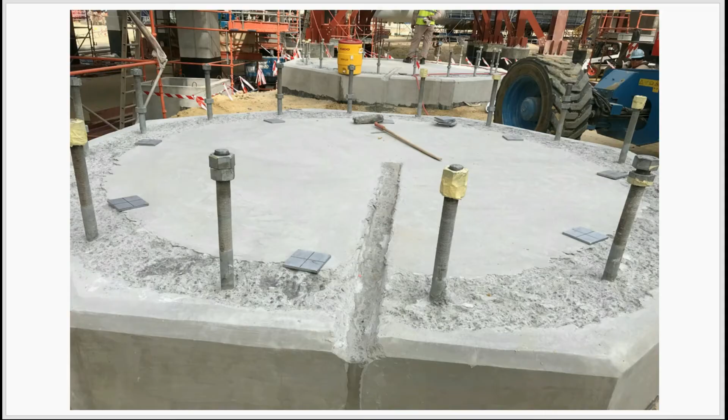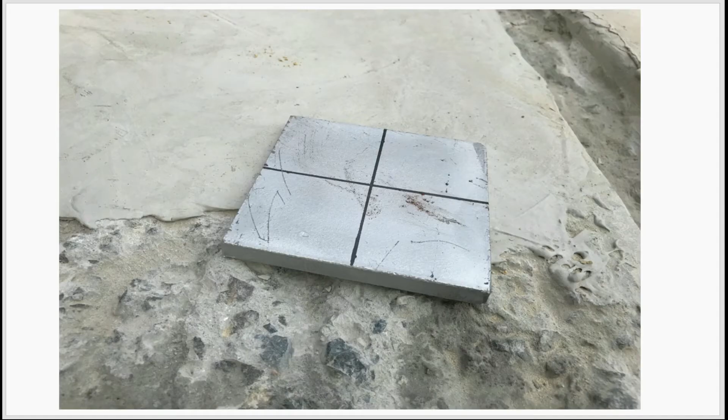Okay, so let's go to another photo. Here you can see this is a pad plate. Maybe it is 150 mm, and the thickness is almost 15 to 20 mm. So this is called a pad plate. And why is this marking done? Because this is the center line of the pad plate,

and when you mark the center line of the foundation as per the drawing, when you mark the foundation outline, you have to match this one, right? And always remember, this pad plate should be inside the vessel. I will discuss that in the next slides.

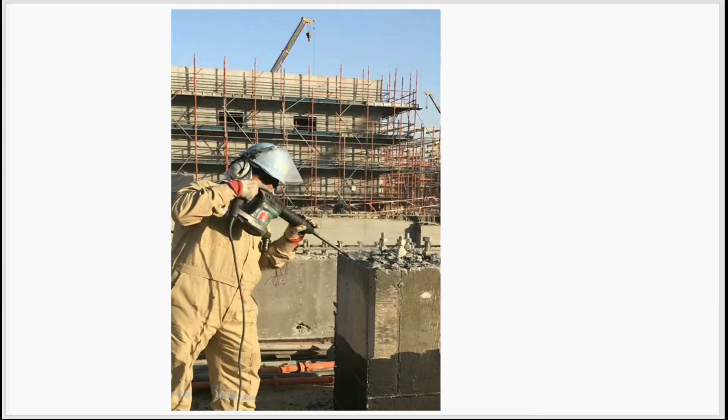Okay, so I want to show you here what tool they use and how we do that. See, this is just an example of a foundation, though it is a structural foundation, and this is the machine. This is called a chipping machine. It runs on electricity, and here is a button.

So when you push the button, you have to hold it very tightly because it gives a lot of pressure, like a gun, same as a drilling machine. You have to hold it very tightly so that you can chip it, otherwise it will bounce back and can cause damage to you. Okay, so this is how we are going to chip.

We will just push a little, and then chip some 25 mm to 50 mm, as per the foreman and supervisor, or you can refer to the drawing for how much chipping you want. And the foundation also has some elevation. So you have to check first the elevation of the foundation and the required elevation for the pad plate, subtract between them, and that amount is what you have to chip.

Okay, understood this point? I'll tell you in the drawing section. I will also make a new video on the drawing section. I will be discussing foundation drawings, general arrangement of the equipment and installation, and what points we do, what QC checks, everything.

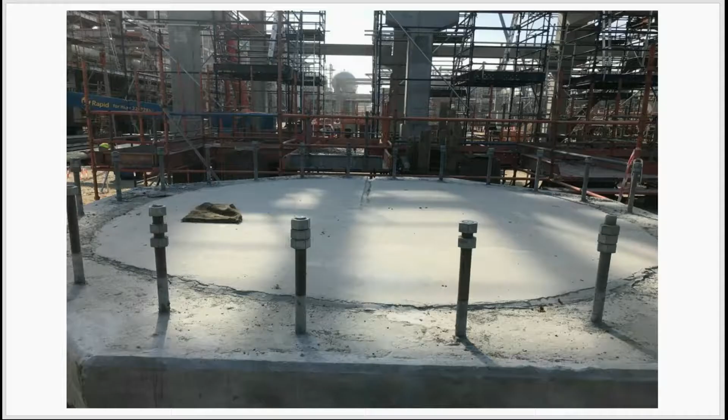And here, this is just an example of a foundation, how it looks when the pouring is done, when the civil guys hand over the foundation to you. This is also handover, but you have to backfill before erection. You can do chipping, padding, everything, but before the erection you have to backfill up to the bitumen coating.

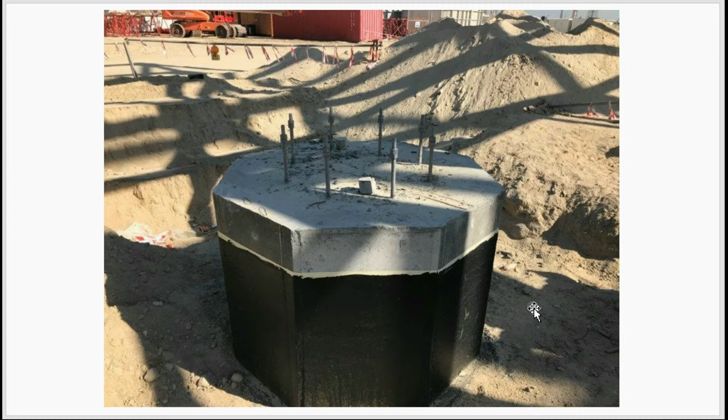This black marking. This is another foundation example of a pump or any kind of skid, like a rectangular skid, pump, compressor skid, anything. These boxes are called anchor boxes, or sometimes grout holes, but anchor box is the perfect word for this.

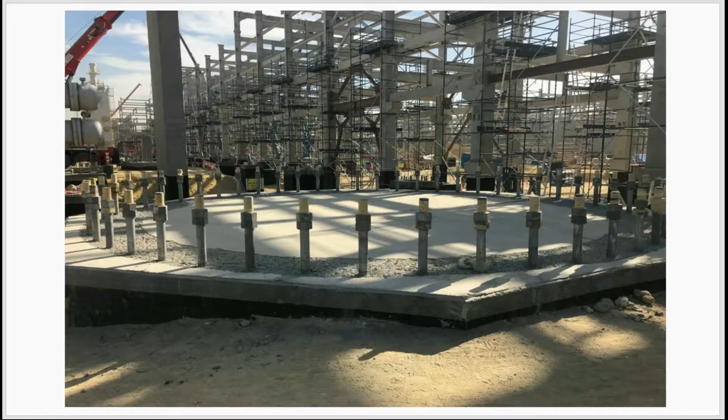And in this picture you can see there was a foundation. These are the anchor bolts, and near the anchor bolts chipping is done. See the surface here, and where the surface changes. So this is what they did, the chipping, breaking the foundation a little. Here they are going to fix the skid after the installation. Only the skid of the vessel is wanted to grout.

So this is how you have to do chipping. No need to do chipping for all of it. And again I am telling you, this all depends on the drawing and the kind of vessel you are going to install.

So if skid is all over, you have to chip all over. Okay, if skid is just like that and there is a lot of gap, no need to chip all over. Only for the machine which runs really very heavy, more than 3500 rpm or something, then you have to grout full. And there are also, okay, let's not discuss grouting, I will discuss it in the next video.

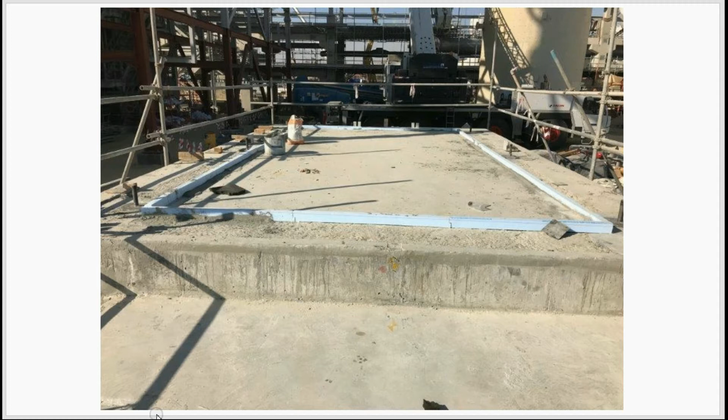And this is not just like fixing something, what people do while constructing a building. No, it is not like that. You have to check the elevation of this pad plate with the auto level. There is an instrument called auto level, you can search it on Google, and from the auto level they check the elevation, and with the spirit level, which is used for leveling something. It consists of water or oil which has one bubble, and when it is level it comes in between. Go and do a little Google on spirit level and auto level.

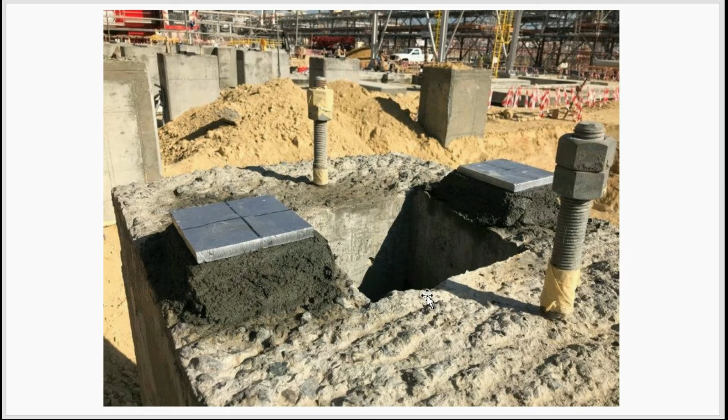Okay, and this is the anchor box. So it is actually a structural foundation, but I want to convey that this is how a padding looks. And then you have to make the shoring and all, and then just keep it curing. You have to go for curing, and when the curing is done it will look like this. See, it will look like this, chipping is also here, padding is also here, and this is masking tape.

They fix it so that while grouting it should not stick to the bolt, or it should not rust, and there are many reasons for this. See, a lot of logic is there. While erection it should not damage the thread of the bolt. There are a lot of reasons to put the masking tape. So it will look like this after the padding curing is done.

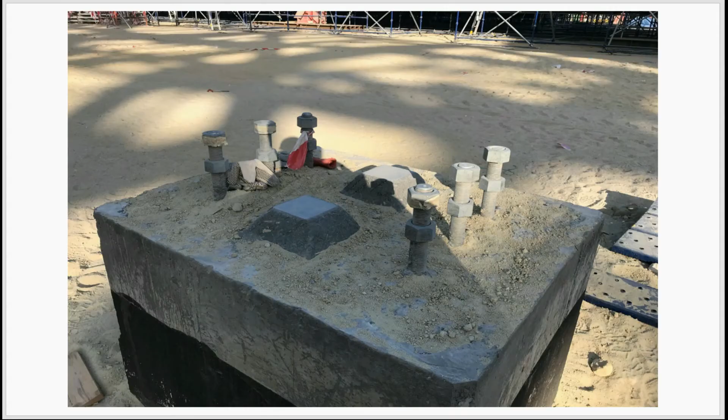Curing depends on the project specification, but in my experience so far, it goes for 2 days, 3 days, 7 days. It depends on how much delay you want in the project. So that depends. So after the curing is done, it will also look like this. This is the structural foundation, and here they fix two paddings.

So padding is sometimes given in the drawing. The major point here is, will you do padding all over the foundation? No, either the point is given in the drawing, or otherwise you have to think where the skirt or the base of the equipment is going to sit, where it is going to absorb more pressure, only there you have to put the padding. But there is an engineering way to decide.

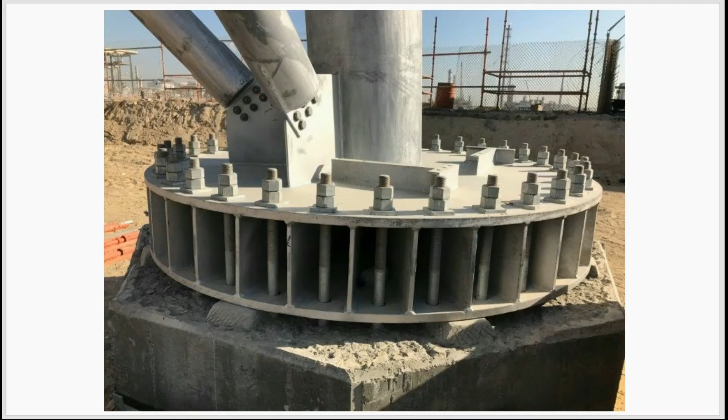If the foundation is very big, then you can go for 800 mm, around 1 meter. The distance between two paddings should be 800 mm, or else, see here, you can skip two bolts and then fix one padding, or here also you can put, no problem. You can put them all near the bolts, or else skip one or two bolts to maintain the distance. But no need to put a lot of padding, because it is just to support the vessel so that you can do perfect grouting. There is no other use for this. So this is the logic.

See here, I want to show you, this is the equipment which is installed on the padding. You can see the gap here, right? This is the gap we are going to fill. That is called grouting. Before that we have to do alignment. Simple, isn't it?

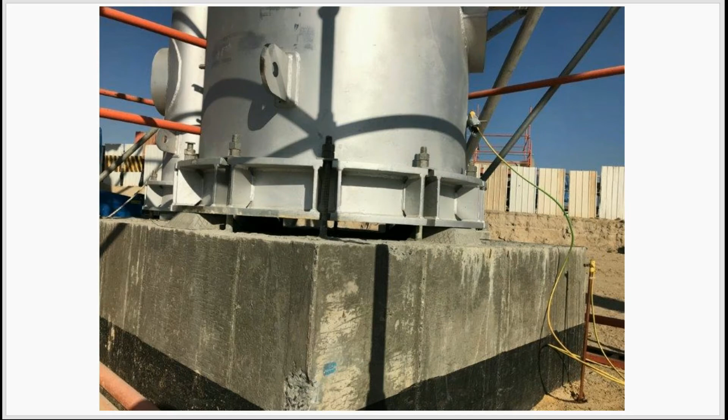This is another example of the flare skid which is sitting on the padding. See the gap of the padding, it is almost like this, the two foundations in between. And one more thing you have to think about here is the pad plate, how much it is out. Actually it should not be out. This is not good, though it is acceptable. But in your project, try not to make it outside; make it at least 5 mm inside, so that the grout holds the plate of the foundation of the skid very tightly.

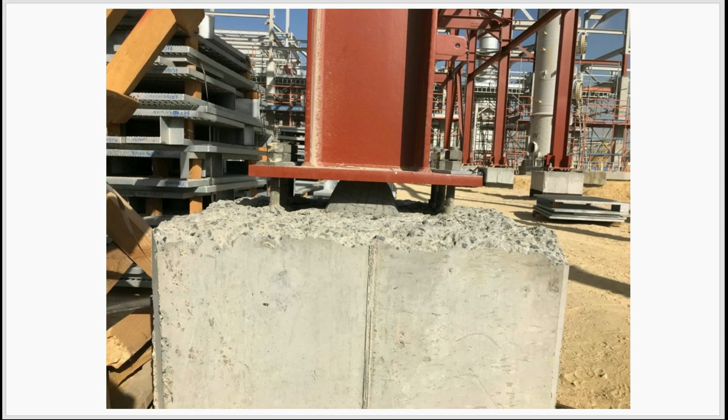And here you can see padding is done for the structural. So what you learn from here is, chipping, padding and grouting is required for almost everything in the refinery construction industry, whether it is a structural support, a structure, a vessel, equipment, rotating equipment, static equipment, anything. Even for a firefighting skid, sometimes you require chipping and padding. So this was just a general point.

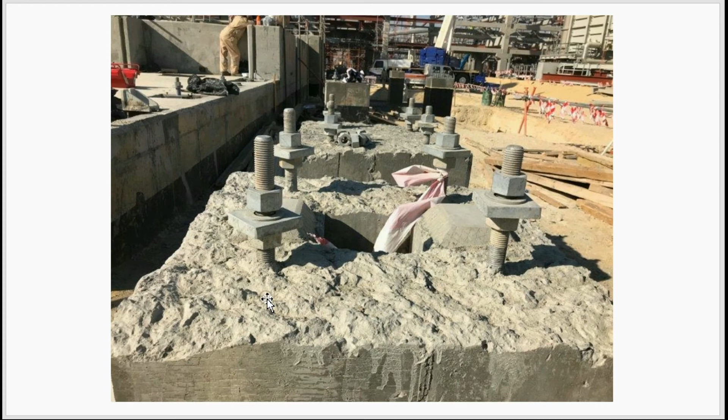And here I also want to show you a structural foundation where chipping is done, and this is the pad plate. You can call it a support plate, or a sliding plate. No, it is not a sliding plate because a bolt is there, so it will not slide. But sometimes, even when a bolt is there, if slotted holes are in the skid of the vessel, it will slide, right? So my point of view is right. You can also call it an embedded plate.

Why embedded plate? Because you can see here, the same plate has an enlarged portion at the bottom. This enlarged portion goes into an anchor box hole in this foundation, and then we put the grouting inside so that it holds very tightly, because it is a compressor skid and it is going to exert a lot of pressure.

You will learn a lot of things by sharing and caring. And this is not enough, right? I am just giving you an overview. Go and search on Google, do your own research, and you can find a lot of things.

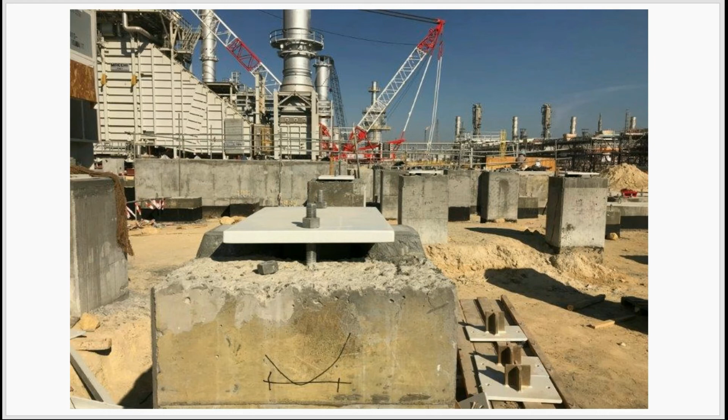I don't have much experience, I am telling you frankly, but yes, the point of view, the logic I applied. I have seen a lot of people who really don't know how to read and write, but they are experts in this industry. Just think how logical it is, so that everyone understands easily. Then why can't you, bro? You can also learn very fast, very easily. Don't worry, you will attend and crack all the interviews while you are a fresher. It depends on your talent and communication skills; that is really a big thing. So develop your communication skills, your skills and knowledge in the field you are going to apply to, and learn from many sources, not one single source. Refer to some books, some videos, some Google articles.